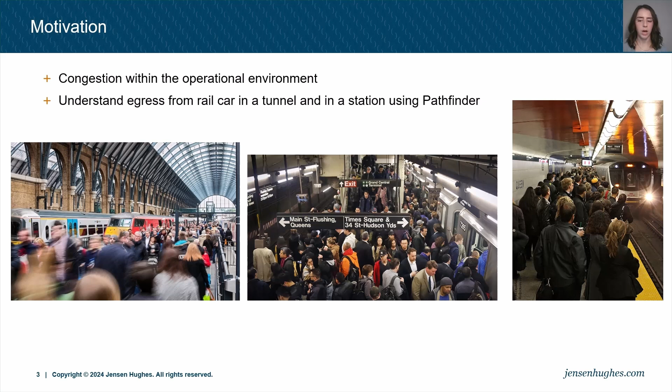The motivation for this research is due to the differences in egress from a rail car versus typical commercial buildings. When egressing from a rail car, occupants can experience highly congested environments and also have unique considerations like navigating through tight aisles within the rail car itself. The goal of this study is to understand egress from a rail car in a tunnel and in a station using Pathfinder, and to quantify the impact of the operational environment by looking at relevant input parameters.

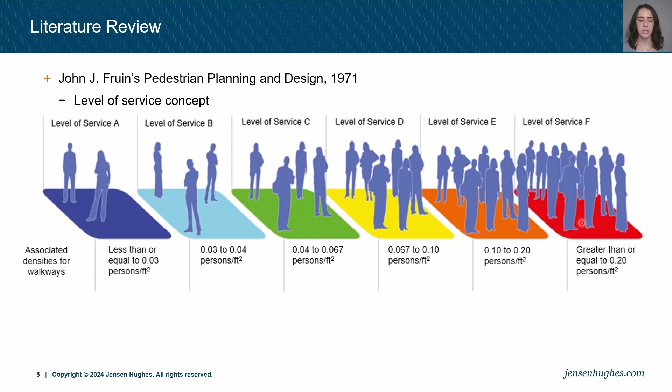A literature review was conducted, first looking at Fruin's Pedestrian Planning and Design Guide. Fruin introduces the level of service concept, which considers density effects and how that impacts speed. So Fruin's level of service A here considers a low density of occupants, and as we go up, we can see level of service F considers the highest density of occupants.

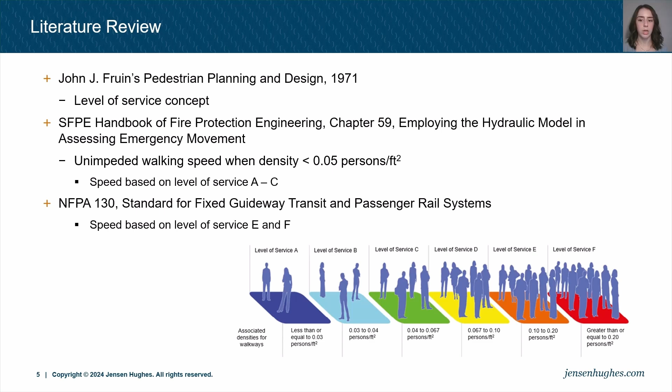The Pedestrian Planning and Design Guide is the basis for data utilized in industry standards, specifically the sources shown here on the screen. The results from these inputs will be used to inform the parameters studied in this model and will be further explained later in the presentation.

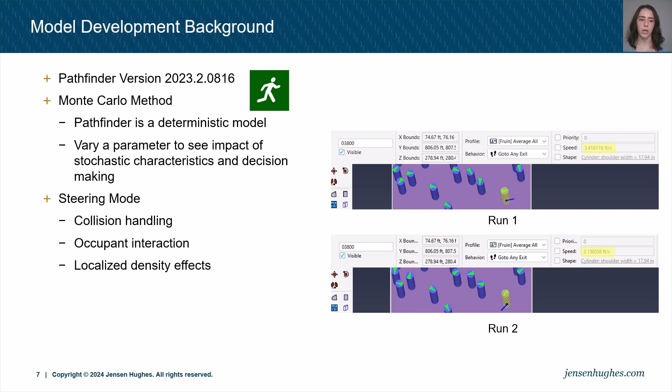We also use steering mode. Steering mode is used to try to mimic human behavior as much as possible and considers things like collision handling, occupant interaction, and local density effects.

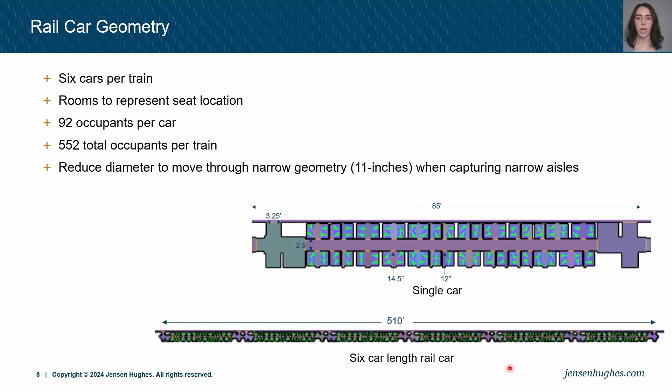Something to note is that when modeling railcar egress in Pathfinder, it is recommended to click the option to reduce diameter to move through narrow geometry when capturing the movement through those narrow aisles.

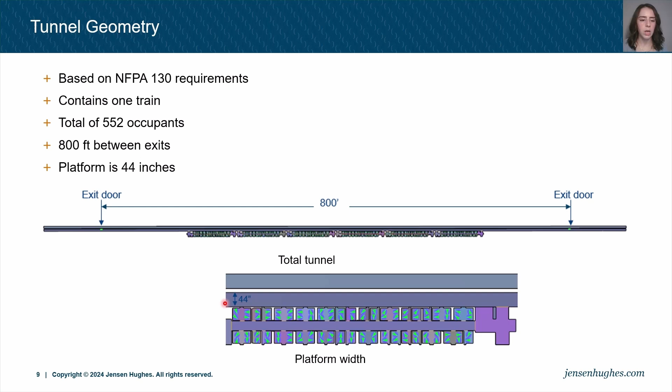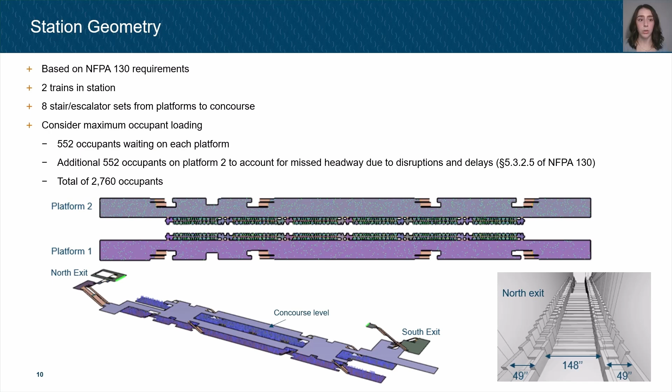So there's going to be 552 occupants waiting on either platform. An additional 552 occupants will be located on platform 2 to account for missed headway due to disruptions and delays. And this guidance was found in NFPA 130. So in general, there's going to be about 2,700 occupants located within the station.

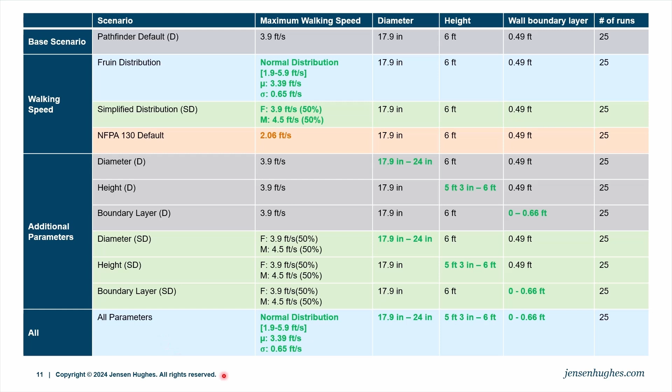Something to note also is that when looking at the additional parameters, we're going to be analyzing those when utilizing the maximum walking speed from Pathfinder, so that 3.9 feet per second default. And then we'll also be looking at the parameters when using the simplified distribution for walking speed. And then lastly, we're going to be looking at varying all the parameters at once to represent something more realistic, utilizing all these parameters highlighted and bolded in green.

So we are not going to be looking at the NFPA 130 walking speed moving forward in this research. This is because diagnostic models were run that showed that the average egress time when using the NFPA 130 walking speed was 117% greater than when using that Pathfinder default value.

NFPA 130 speed accounts for a high density of occupants, which equates to level of service E or F. If we look at that high density of occupants, the NFPA 130 walking speed on the corridor is indicated by the star here on the screen.

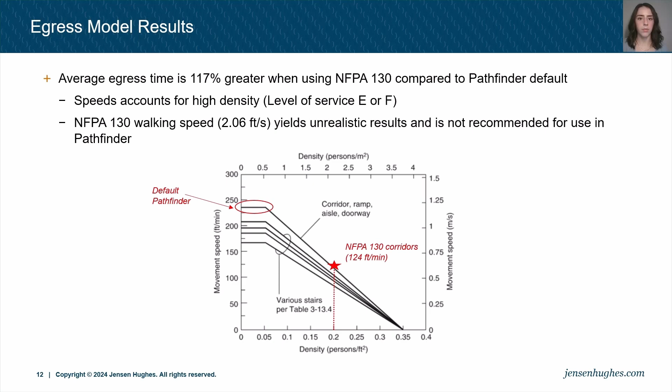So that NFPA 130 walking speed of 2.06 feet per second yields unrealistic results and is not recommended for use in Pathfinder, because Pathfinder uses the default walking speed of 3.9 feet per second and then incorporates localized density effects and reduces the speed accordingly based on its algorithm. So incorporating a default walking speed that considers a density reduction is overly conservative and is not recommended.

So we started with running a base case for the station and noticed something interesting with the egress from occupants. In general, we're going to assume that escalators shut down upon fire alarm activation. So the escalators that are modeled in Pathfinder are going to be treated as stairs. Occupants will just walk up those as normal.

So as we can see here listed on the screen for both the north and the south exit, occupants are not equally distributing between the means of egress. We have occupants that are utilizing this escalator here, this stair here, but the escalator that's highlighted in red is not being utilized. So we needed to consider parameters that factor into cost and how this is going to impact occupant decision making.

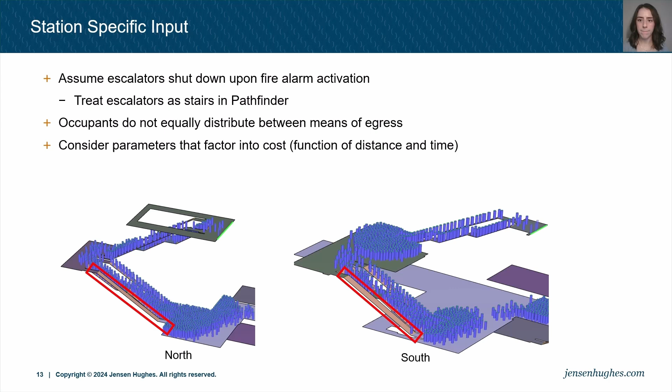It was determined that the current room distance penalty is the parameter that we wanted to look at to fix this issue that we were seeing in Pathfinder. The current room distance penalty is a basic implementation of fatigue, where occupants prefer shorter distances over shorter times the greater distance they travel within a room. The default value for this parameter is 35 meters, and it is recommended to change it to 0.

When it's changed to 0, this eliminates decision-making as a function of the concourse length, and we can see the impact of changing that parameter in this table here. So if we utilize the default values, we can see how occupants distribute between escalator 1 and escalator 2, which are referred to in this image here.

So we can see that the default parameter has an uneven distribution for the north escalator. We have about a 9 and 91% variation there. And then if we go to the south escalator, we can see that that distribution is once again uneven. We have a 30 and 70% distribution.

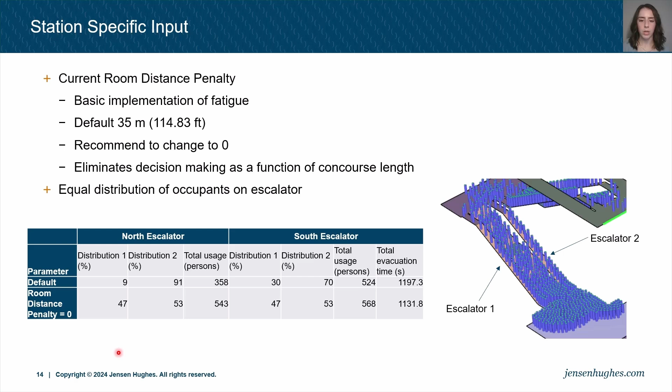When we change that room distance penalty to 0, we're getting a relatively even distribution between both escalators, close to a 50-50% distribution. And we can see here in this image that occupants are visually also using both of those escalators.

So after establishing the proper inputs for the station, all of the scenarios were run and the data is presented here. Something to note is that the minimum egress time, average egress time, and maximum egress time presented in this table considers the 25 Monte Carlo runs that were performed.

So the way to analyze parameter impacts is by looking at the variations in the data. The minimum and maximum variation is calculated as shown here, and this helps to inform the impact of the Monte Carlo analysis on this study. The second variation is the variation relative to the default value, and that is calculated as highlighted here. This helps to determine the greater impact of a specific parameter.

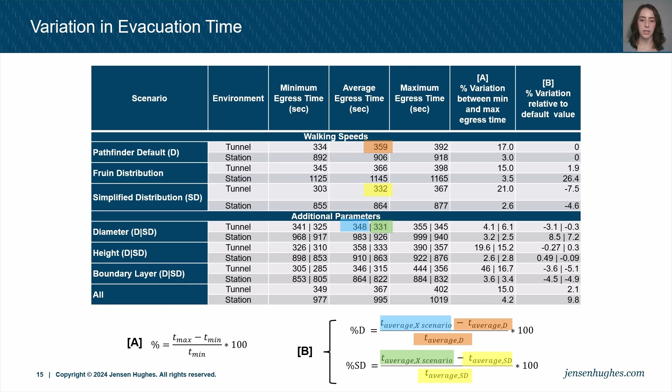And something else to note is that we have different formulas that are being used when looking at the default speed and the impact on the parameter and the simplified distribution, indicated by SD here. So we can see those different formulas highlighted for proper comparison.

So first we'll be looking at the individual variation within walking speed. What we have here is showing the minimum, average, and maximum egress times for the tunnel on the left, and the same thing shown for the station on the right. When looking at the tunnel, we can see that there is a 17% variation in the total egress times with the default Pathfinder inputs, and we can see that there is a 3% expected variation for the station when utilizing the default values as well.

So this is highlighting the importance of performing a sensitivity analysis and the environment itself, because you can either over or under predict the total egress time based on the percent differences shown here on the screen. A similar conclusion can be drawn for both operational environments utilizing the other walking speeds that were analyzed, which are the Fruin normal distribution and the simplified distribution of walking speed.

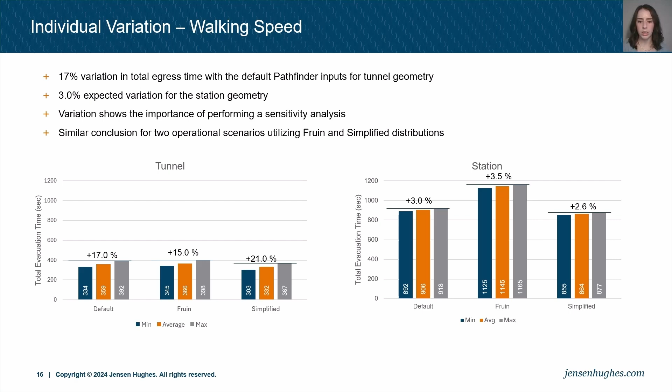So when utilizing Fruin's normal distribution of walking speeds, 50% of occupants are moving at speeds less than that mean value. We have an average walking speed of 4.2 feet per second when utilizing the simplified distribution, which is faster than the Pathfinder default, which makes sense why we're seeing this negative variation shown in the table. We can see, though, that there is a large variation within the Fruin walking speed distribution for the station in particular. So we're going to look at why that impacts the station more.

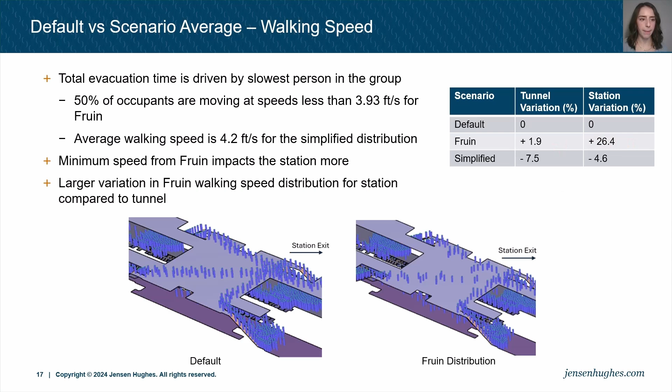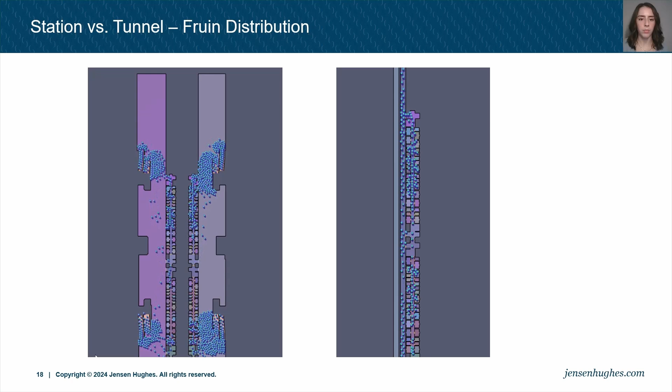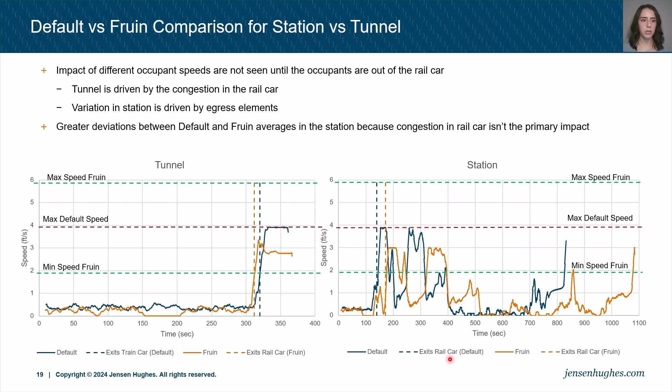Once occupants are out of the rail car for the station, we can see that there's a lot of variability within that speed. We can see that sometimes they're able to reach that max, but we see a lot of variability. And that variability is due to the means of egress within the station. We have the stairs and the escalator combinations, and we have a lot of queuing that occurs and reductions in speed that occur at these locations. So these can be attributed to the greater deviations that we're seeing for the station rather than the tunnel.

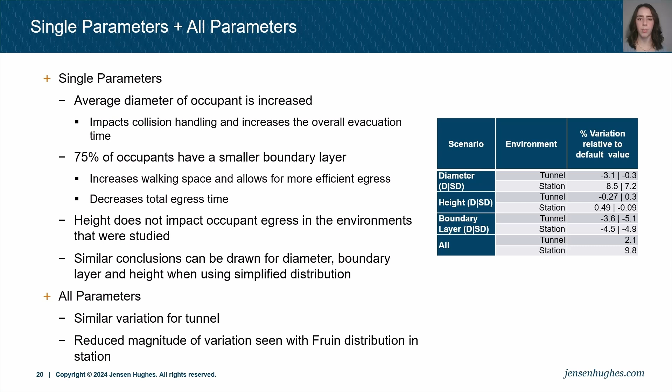When we look at all parameters and vary all parameters at once, this is to show what would be more realistic of what we would see in a typical train scenario. So we're seeing a similar variation with the tunnel that we did previously, but there is a reduced magnitude of variation seen when looking at the station compared to the Fruin distribution. And this is because when combining all those parameters, this is more realistic, and we can see that the impacts of parameters like diameter are decreasing the impact of the variability in the speed.

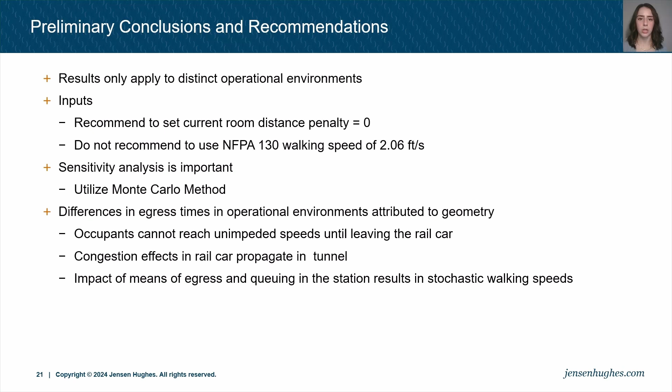And lastly, we see differences in egress times due to operational environments, and this can be attributed to geometry. Occupants are not able to reach those unimpeded walking speeds until they leave the rail car because of all the congestion that occurs within the rail car. The congestion effects within the rail car propagate within the tunnel, while we see different impacts within the station because of the means of egress and queuing that occurs in the station, which results in the stochastic walking speeds that we saw.